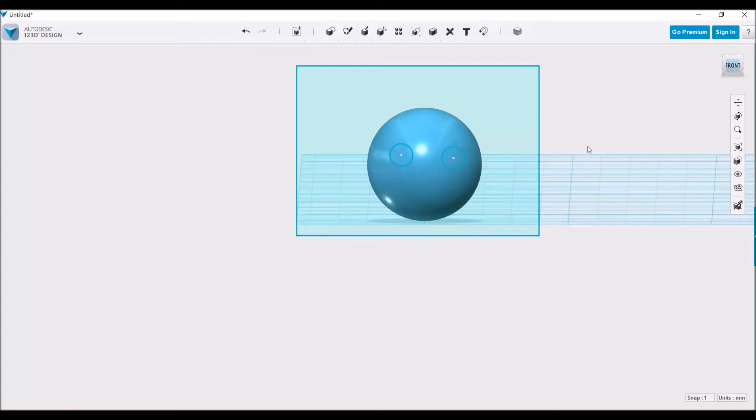There are a lot of applications to using the Split Solid tool, but I've used it recently in putting faces on certain objects, like a lot of the videos I've shown on my YouTube channel, such as King Bob-omb, putting the dots on the piranha plant, and other things. So let me show you how we can do this.

First, we have a sketch that we want to basically project onto an object, but we want to make that a separate object so that we can change the color or the material it's made out of. So if we select the sketches and extrude them onto the object...

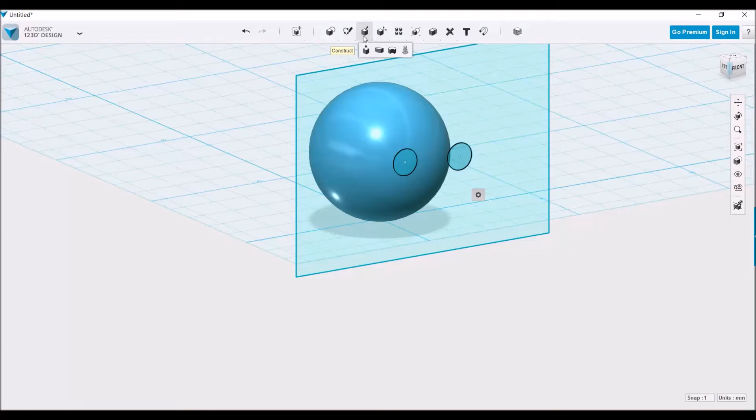We now have basically an extruded version of the faces that we want. In this case, we're using eyes on a head. So in order to make these features flush with the rest of the object, we can use the Split Solid tool to delete part of these circles that make up the eyes.

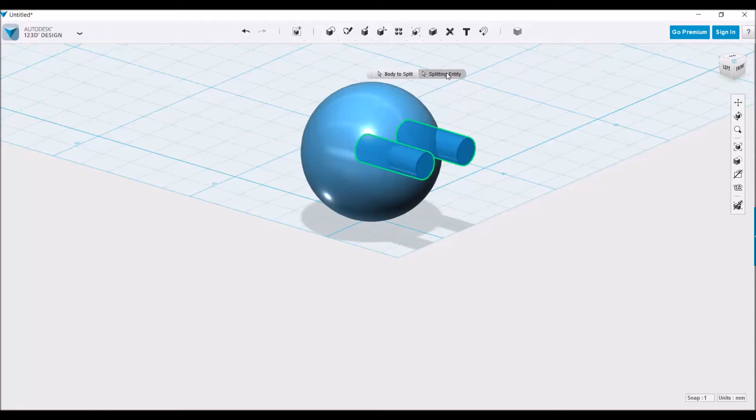To do that, we go up to Modify, Split Solid. It prompts us to choose the body to split — in this case, the two eyes. Then it asks us what the splitting entity will be — in this case, the surface that makes up the outer portion of this head. After those are all selected, click Enter.

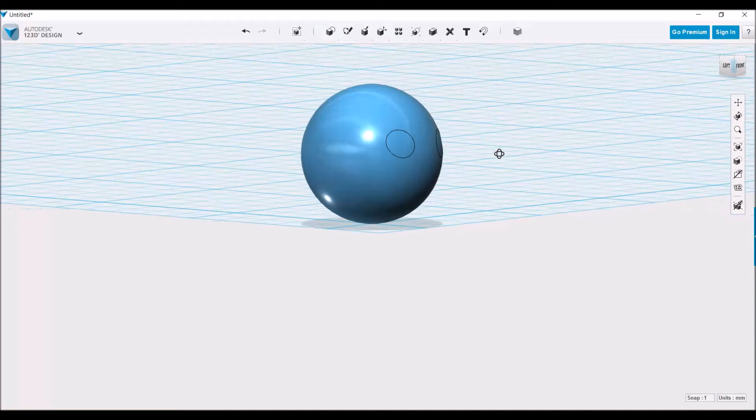Now you can see that the eyes are separate from the rest of the head. If we click on both of those and delete, you'll see they are now projected onto the object. In fact, they are even separate objects from the rest of the head, so now we can make these different colors and different types of material.

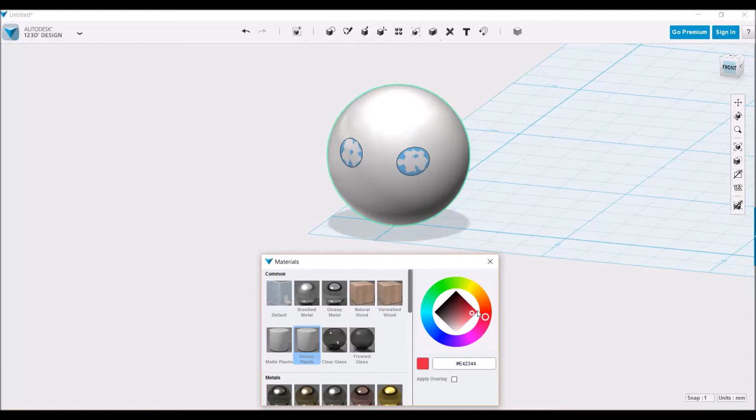Now, in a lot of cases, especially when you're doing this on a curved surface, you're going to get this thing where it is slightly within the object you used to split it and slightly without, as you can see from the different colors.

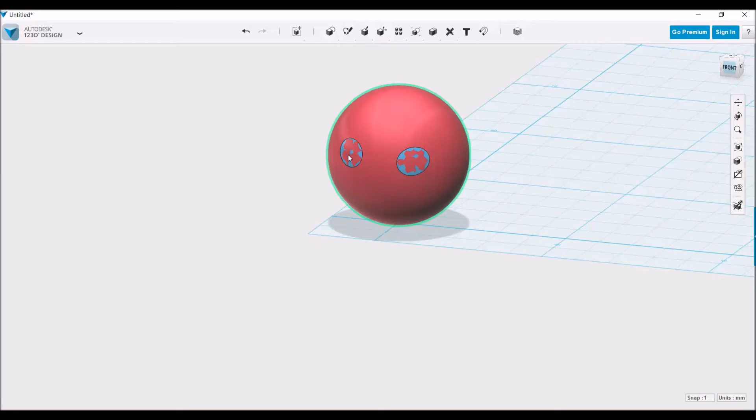So what I normally do is go to Modify, Press and Pull, and select those surfaces that make up the features I want flush with the rest of the object. I selected both of these, and I pull them out just a little bit — this could be a tenth or even a hundredth of a millimeter, anything that gets rid of that disparity in material.

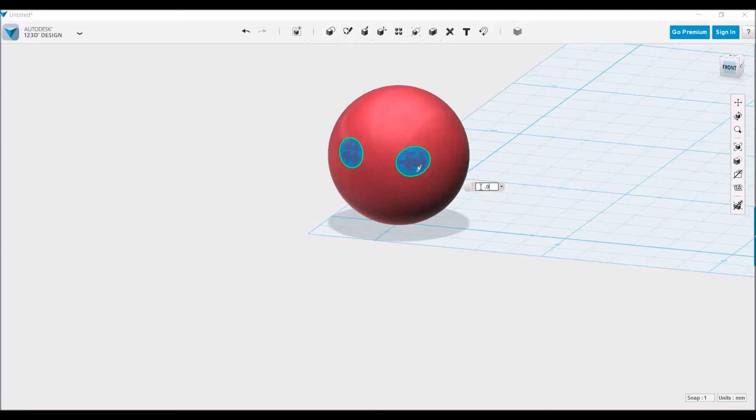This will make them slightly outside the rest of the object, but you can use either the fillet tool or any other tool to modify it so that it is more flush with the rest of the object.